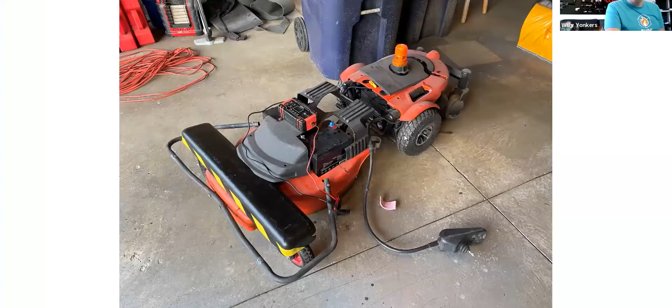So let me share my screen for a little bit, and then I'll jump back to show you my progress on that guy. Can you guys see what I'm showing on my screen? It looks like an orange tank.

So the back end is basically a power wheelchair that I got off of Craigslist for like $100. You can get these pretty cheaply locally. It's a little bit of a weird experience because it's usually from a family member who's had someone in their family pass recently, so you want to be a little careful about just being kind.

It's a little gross cleaning them up because they're very personal objects - there's hair, dead skin, and all these personal human things that come off of you are on them. So you want to clean it up. I did that, took it apart, and figured out how it works.

The hand control is a little too integrated to actually break apart and start rewiring things, so that's why I went with the decision to just control the joystick remotely, as if I was there with my hands on it. I basically took off the seat and threw it away, threw it in the recycling.

And then I got an electric lawnmower off of Craigslist also for like 20 bucks. It had no batteries, was really rusted and kind of crummy. So I had to get a pair of new motorcycle batteries for it - that was like 12 volts each, or 24 volts total, so it matched the wheelchair's power.

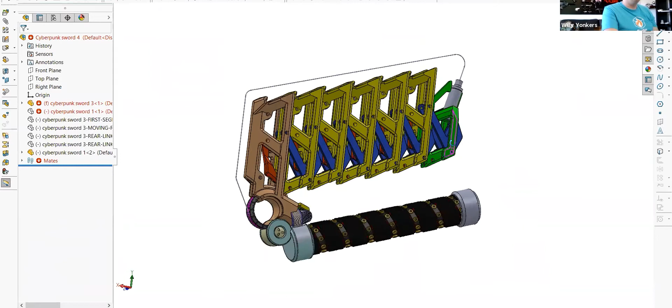So here's a bunch of projects that are kind of relevant to what we're talking about. I have this one up here. This is a crazy fold-out sword that I was going to make for a prop, semi-related to the game Cyberpunk, kind of inspired by that. I have a line of other Cyberpunk-inspired props that I can show off.

This is a product I made while at ThinkGeek. So this is a Bluetooth wireless game controller for iOS or Android.

I actually am on one of the early patents for the first iOS game controller, which basically we took a wireless Bluetooth keyboard, which is pretty much supported by everybody, and translated it into having the WASD keys on your keyboard doing up, down, right, and then AB and all the other buttons on your controller.

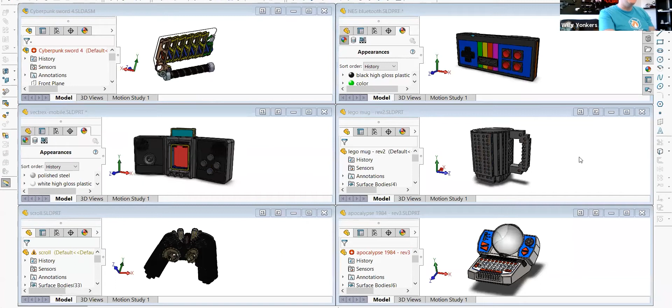So the first thing we ever did was the Icade, which was an April Fool's product. If you know ThinkGeek, every year we would do crazy fake products, and occasionally they would turn into real ones. So let's see.

This is an original kind of rendering of the Icade, which had the original iPad, which just slid in the top and then would connect via that wireless Bluetooth connection.

We actually made the first prototype before the iPad was on sale. So I made a mock-up, which was just a print of the front and back on a couple layers of foam core and taped it up and put it in the box for the video we did.

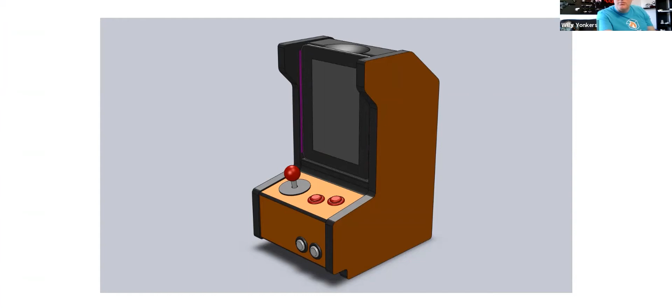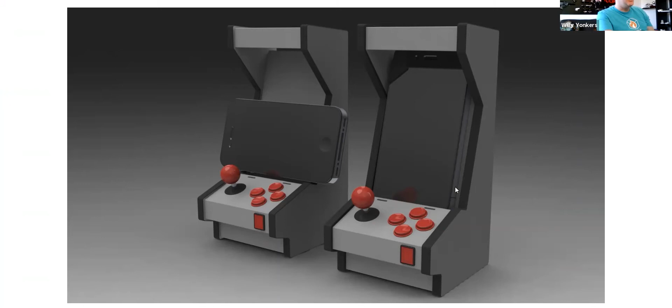Later on, we did some updates with some manufacturing partners. So this was a smaller version, which would hold your iPhone. It was designed around the iPhone 4 at the time. So it had a pass-through for the charging cable, but basically the same electronics as in the earlier Icade products.

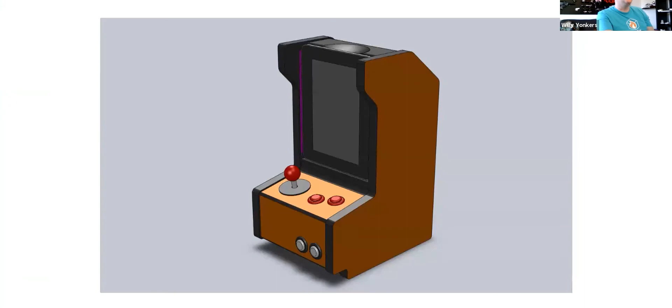So there was the original Icade, the Icade Junior, and then this little 8-bitty, I think we called it, which was a knockoff of the original NES game controller.

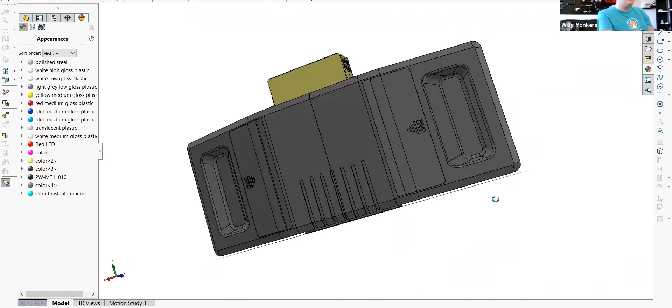So following a little bit with more of the gaming stuff, this is a fake product that I made that I never released, which was a portable version of the 80s vector graphics console, which was kind of a luggable object. It looked a lot like the original Macintosh computers, these big bricks.

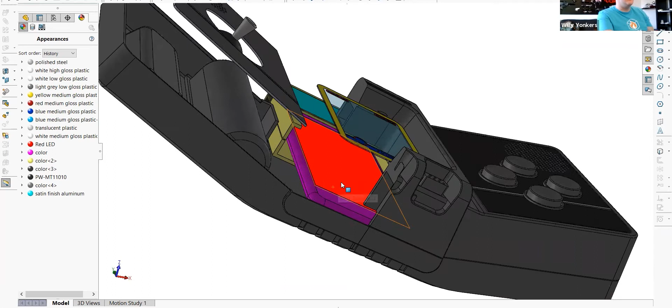But it had little cartridges and you slide it in. This version, I think I intended to put an iPhone inside. That was a good trick for making props and things - you just slide an iPhone in and put some graphics on the screen, and it lets you cheat a lot. You get fake screens that way really easily.

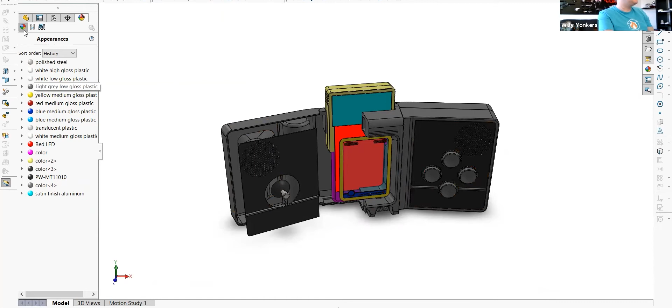This one I actually printed out and it looked okay, but it's not something I would ever share. Just kind of a fun thing to mess around with, using somebody's existing styling. It had this nice aluminum joystick.

The actual controller kind of folds up into the body of the unit and had 4 buttons. So I was kind of duplicating the functionality, things like that of it.

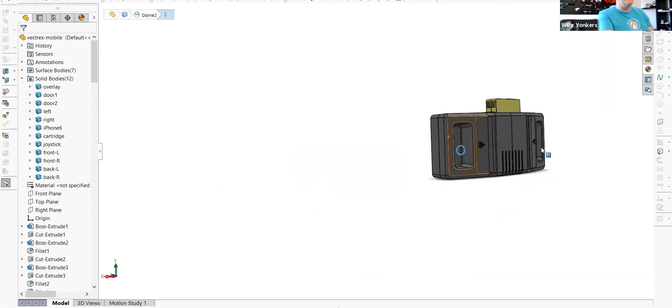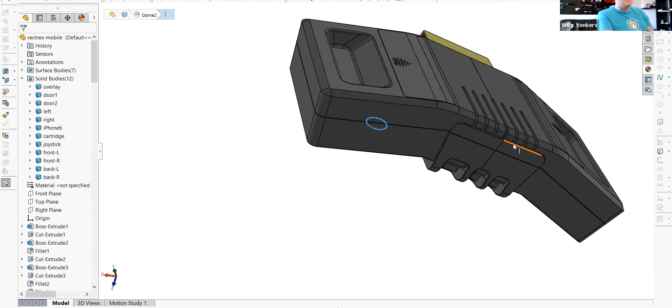I made a little bit of an affordance for how some of the electronics would work in the 80s. They didn't really have LCD screens back then, so I forget what company, but a couple of them made actually very tiny cathode ray tubes that were really weirdly shaped - they actually bent around a little bit. So I think one of those would fit in there, and I had some room for giant chunky C or D cell batteries to fill this thing up, and then it would run for like a half hour probably in the 80s.

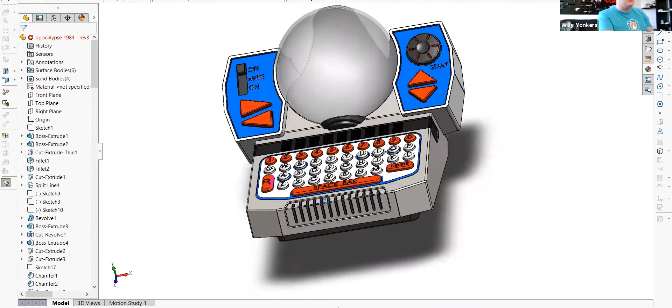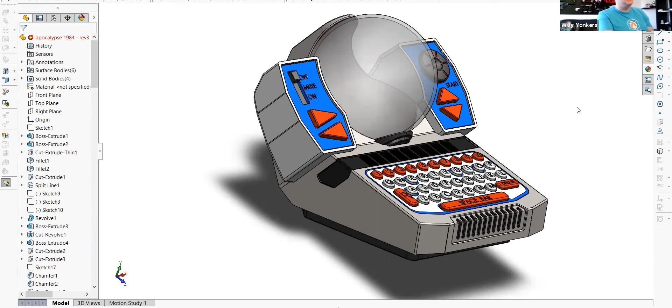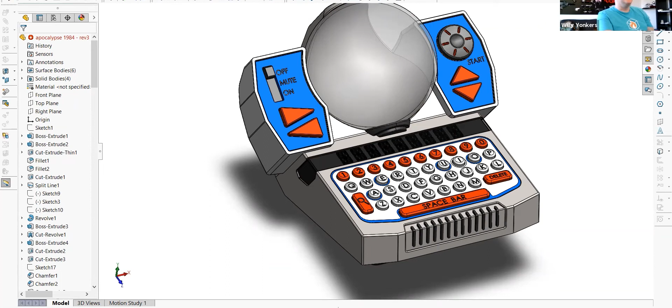Another fake product that never went anywhere was what I called Apocalypse 1984, a mashup of a Speak and Spell. It had the Speak and Spell buttons and segmented alphanumeric displays that would chime what your text input would be. Up top, not pictured in this rendering, was a persistence of vision LED globe, an arc of green LEDs that would blink on and off as it spun, showing a map of the Earth. You'd target different cities with different weapons, like having Bigfoot attack New York City, and it would give you feedback on the damage. It was a pretty dark thing, but meant to be funny.

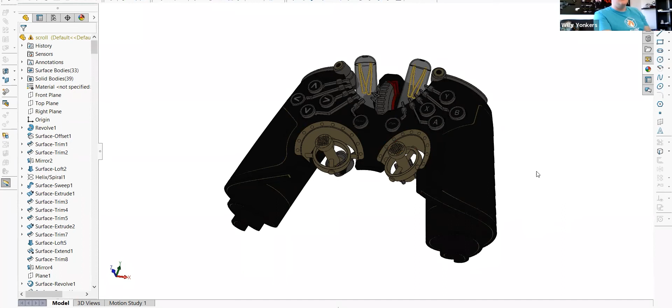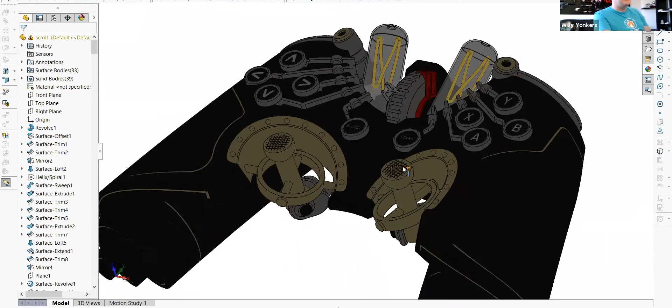Another April Fool's product that actually did get launched was a game controller for a Steam-powered Steam console. This was at least 5 or 6 years ago, when Valve was trying to break into the living room market, selling small pass-throughs that would pipe your big high-end PC gaming into your living room via HDMI, and you'd play it on a weird little controller. We made a fake steampunk-inspired version. It was sort of Art Deco-y, very steampunk, with little mechanical typewriter keys, some Edison light bulb stuff, and lots of brass, chrome, and phenolic plastic.

One of the products I did actually make while at ThinkGeek was the Build on Brick mug. This has been knocked off a ton—if you go on Amazon to look for it, you'll find more fake ones and knockoffs than the actual legitimate article. But this was a product that I worked on from start to finish.

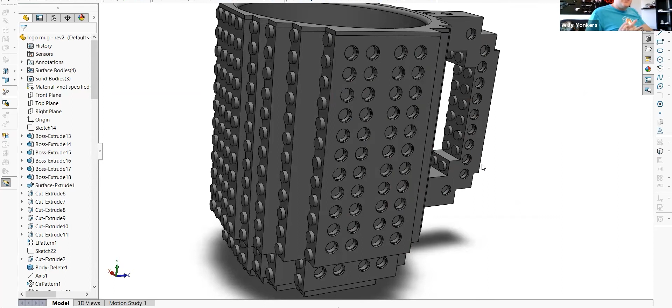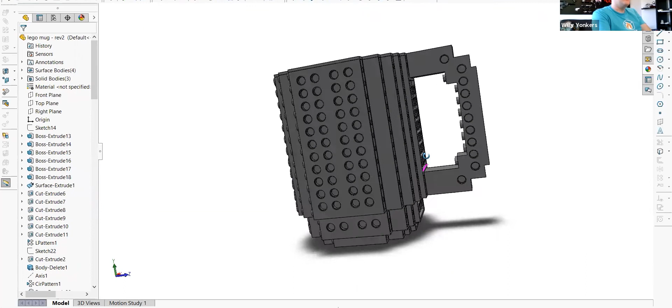We were talking about products at ThinkGeek that were selling well. We had a really informal structure there, where every once in a while I would have meetings about what was selling well. When I started there, ThinkGeek was like 90% existing products, so we had buyers who would buy cool things, a lot of them gray market from Japan—geeky stuff, like a weird Gundam thing or some knockoff Star Wars thing that we'd sell for a bit and then get a cease and desist for and have to take down.

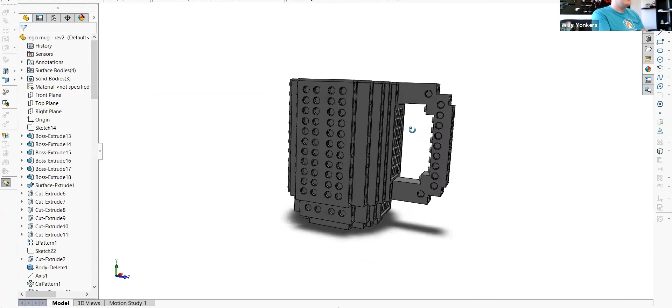What inspired this was that a long time ago there were coffee mugs that looked like high-end telephoto lenses, designed for photography geeks. We were talking about how we could reproduce the success of that—it was an actual legitimate product that wasn't licensed to anybody, so we were just buying those off the open market and selling them on the website. So I thought about things that geeks would like and that were fun to accessorize and play with on your desk.

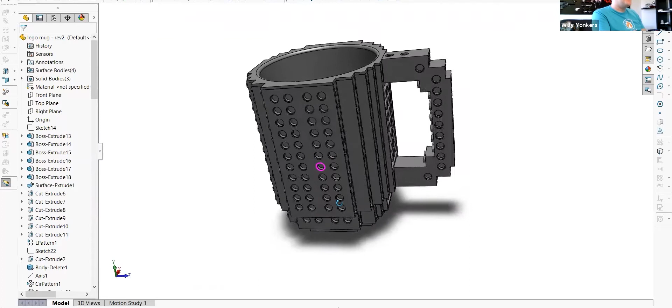And I've been a lifelong Lego fan, so this is inspired by Lego Technic. It's actually built and designed around existing bricks, except for the inside, which is this giant vessel.

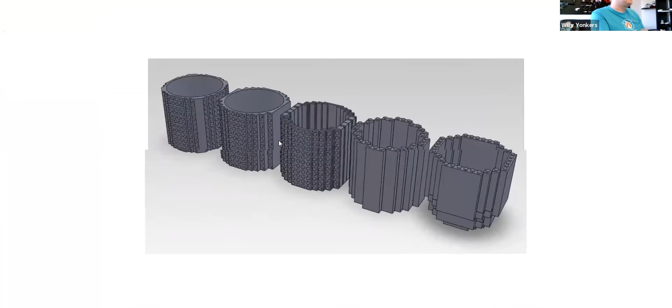Let me open up an image of what that looks like. Here's some of the earlier process work—if you would build it vertically using stacked regular bricks, a couple of different options for that, kind of pixel art from a top-down view. These are some other options for making it out of stacks of plates and bricks. This is probably closest to what I actually went with. Over on the far left is an idea that gets a little further away from traditional Lego geometry—there's this weird sacred geometry of 8 millimeters per stud and things like that, so that was having building surfaces on all the faces.

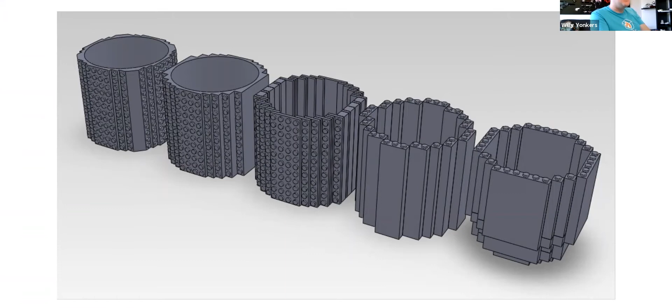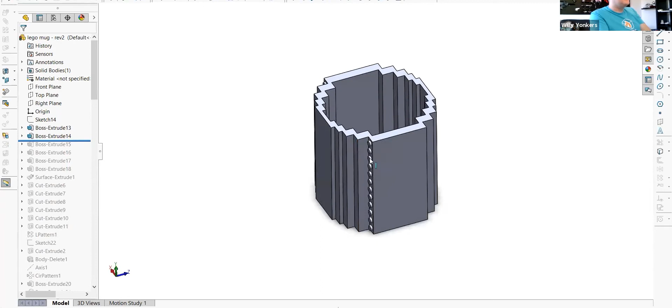So that was some of the early process work. You can kind of see—let me turn off perspective. This is me working out a sketch of how the plates would stack up. Let's pull back. Here's a really early extrusion of the profile, starting to add studs onto it, and more studs galore. It actually went pretty fast—oh, it went to the end.

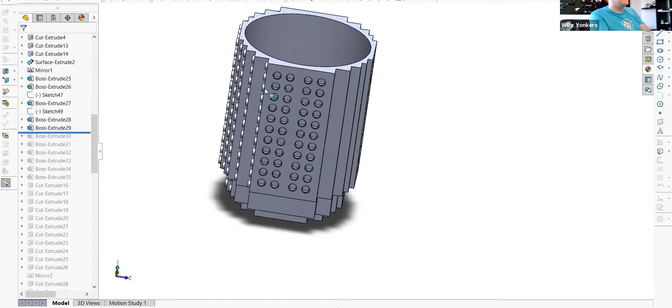So, adding the Technic holes on the sides—it's kind of an unusual pattern, and a lot of reviewers didn't understand how you use it. The Technic pattern is meant to have a spacing across that matches the spacing up and down, but you have to pass over a couple of these holes. Let me open up the other image I have of it.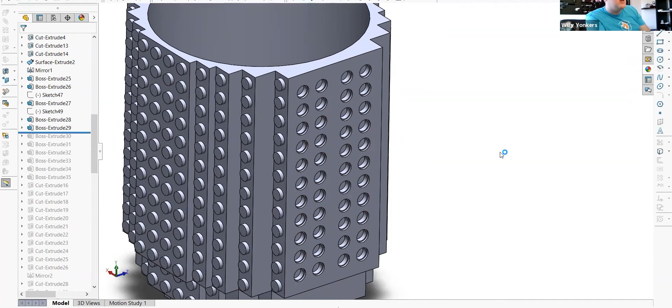Okay, so this is the original spec sheet we made and sent out to a manufacturer in Asia. This is a better rendering of the final product with little lines that show you where the line breaks between parts would be. Across these 4 holes is about the same distance as across these 5 or 6 holes up and down, so you could use a beam in either direction and connect them.

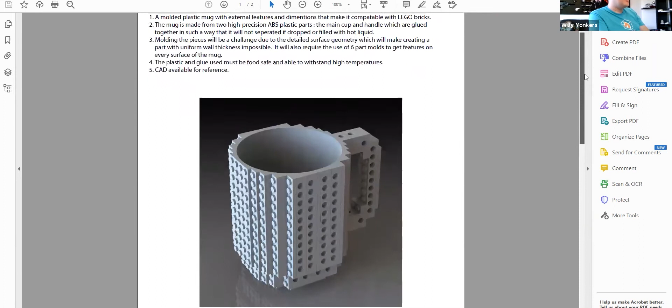So we did pretty low impact design work there. A lot of our stuff was just an illustration by a graphic designer of a cool looking ceramic bowl that would be like a shark's face opening up, and you would eat your cereal out of the shark's mouth. This one was a little more in depth because it was very technical, so I did the full CAD for it, just some material options for how it needed to work as a real product.

I don't think they actually made it out of the right plastic for us. It was supposed to be ABS, but it was a little too cheap, so probably they got away with something.

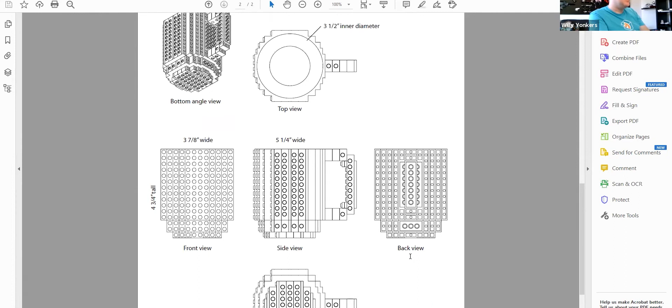Some kind of measured drawings, half scale, because it was an 8.5 by 11 sheet that we would print out. But this was basically what we'd send over to Asia and have some of our manufacturers quote on. We'd do a bunch of design work, a bunch of research, and then kick it over there for quoting for a couple 2 to 6 weeks, and then people would send back estimates on how much it would cost to produce something. We had a bunch of different factories and manufacturers who we would work with. Not all of them would necessarily want to work on these projects because some of them were a little crazy.

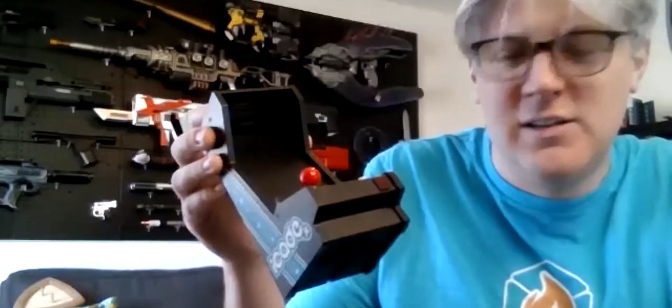So kind of fun things. Sometimes manufacturers get a jump on you and just go wild, and you end up with an actual prototype first article after like a month, when most of the time that's like a 4-month process waiting for them to get in gear and actually quote on you.

So yeah, I love working on game controllers, things like that. I worked at SteelSeries, which is a high-end gaming peripheral company. I actually designed the mouse that I'm using right now.

So this, I think it's the Sensei or something, I forget what it's called. This is the righty-only one. I did another one that was ambidextrous, so it's symmetrical down the middle.

This is another thing where I started the job and they had a huge product line already, so I didn't get to do the styling work of it. I did get to do all the surface modeling in SolidWorks, a little bit of the pattern design. You can see there's this kind of crosses that are triangular - this is a rubber pad, a little bit of the skating surfaces to keep it off of your mouse pad.

But yeah, that was actually kind of a whirlwind project. I started there in the summer of 2015, I think, and had those 2 mice done by November or something. It was crazy. And I did a bunch of other projects for them that didn't get released, but I didn't work there super long because they didn't do super well financially.

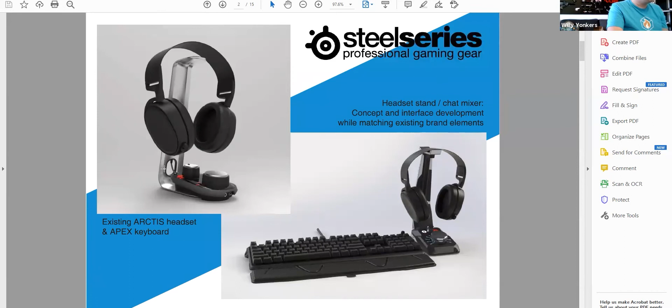This is the SteelSeries stuff. So this is a project that didn't get released. These are some headsets that they have been making forever, since before I even worked there. So I didn't work on the headsets, but we made this stand that had a sensor up at the top that would detect if you'd placed your headset on it, and it would switch between the sound in your PC going to the headset or going to your room speakers just automatically when you set it down.

And then there was this big kind of control deck below it for volume control, and they had a channel kind of fader for your chat in the game or your music that you were listening to in your headphones. So this is kind of what the final product would have looked like. This is just some earlier work with one of their existing keyboards and their existing headset - some of the early process work.

It was a little weird, but frustratingly typical that I started there and they didn't really have all their files and information and images organized well enough to kick off a project. So in the beginning, I actually modeled my own headset - this is not something that ever existed. It's just this kind of goofy, overly rounded, fun headset with a big microphone bar and a little scrolling text field there, which I thought was kind of fun.

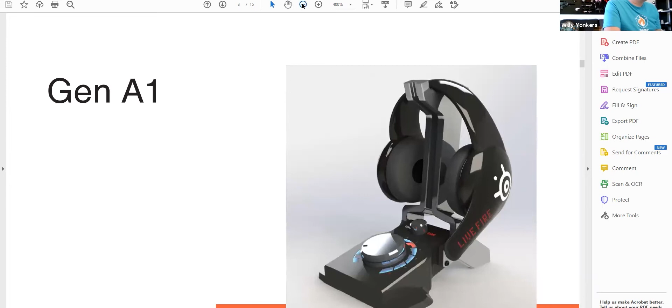And this was one of the very early designs I had, and it looked way too much like the knob on a washing machine, so we didn't go with that, obviously. But I did a bunch of kind of iterations for that early, non-technical, non-mechanical, just kind of the interface project parts of it - the volume control, the fader control, and a stand. That was it. So that's in all these.

This one looked like a parking meter. This one looked like a rotary phone. And then as they kind of collected more and more information and got it to me and told me about what the product should look like, I started honing in on what they wanted and what would be more successful for them as a product.

So the actual control deck started to slim down, look a little bit more like some of their keyboards. The headset stand had the most freedom at this point, so I was playing around with some kind of 2-color, not overmolded, but kind of intermeshing shells of different colors and materials. There's always going to be kind of this U-shaped yoke at the top that holds the headphone headband.

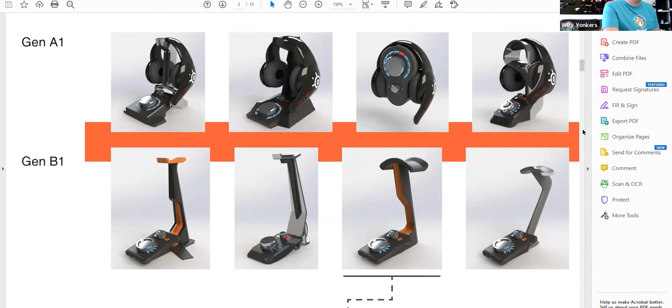But you can see, nothing really came out of the first generation. Generation B had something that kind of led forward. This kind of celery-shaped thing for the stand led to some more exploration of doing just plastic stands. A lot of this is a mishmash of parts that could be kind of interchanged quickly - there was the stand, there was the knobs, and there was the electronics box. So there's a bunch that are kind of similar to this one.

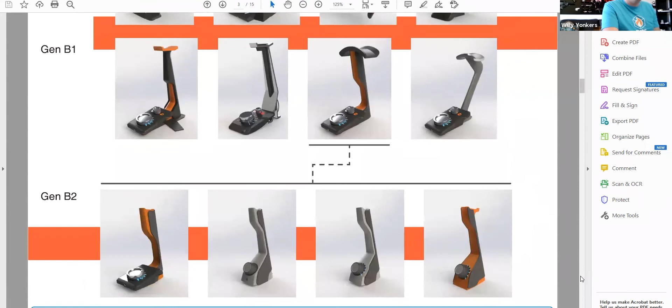After I presented those, they let me know that they actually had an existing headset stand, which was not stamped, but a formed strip of thick sheet aluminum. So we started doing more experimentation around this sheet metal version.

More boxes that I could explore on my own, separate from the stand. It had this little pad on top that was rubber with their logo in it. In this one, we start to see an optical sensor instead of a button or some sort of weighted switch like on earlier products.

This is a bit from that celery-inspired design—a curvy cross section with a kind of tortured stamping of the metal. It wouldn't be simple to form, but it was more structural and more fun to look at.

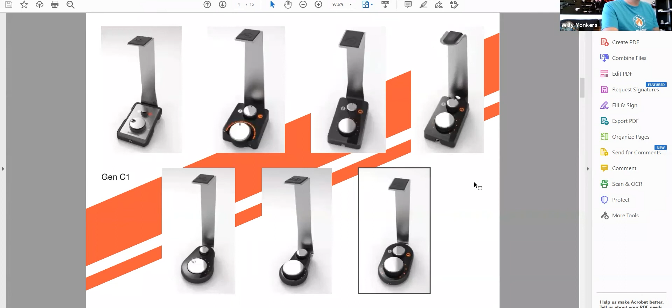And these are some of the interface pieces—the kind of washing machine, rotary dial phone, high-end stereo equipment look, with these very small lines and big, beefy, heavy knobs. Further down the line, we got to talking about having glowing elements, LEDs behind a kind of smoked glass or dark plastic.

Chat? Sorry, I'm trying to see if there's a chat. Oh, okay.

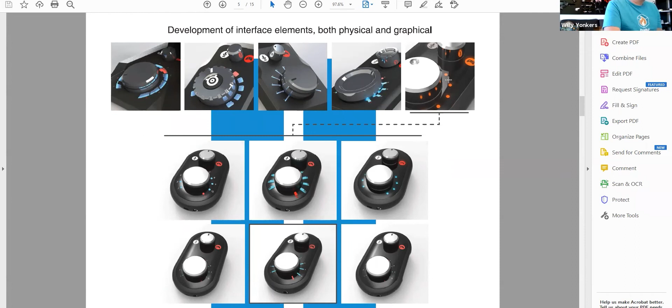Yeah, lighting up through there, lots of exploration. And this is the final presentation—their logo was the only thing you'd see while it was not lit up, and then the interface would actually show up later on.

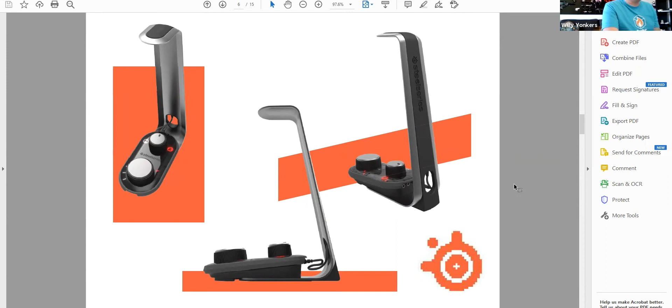So this is that iCade 8-bit line, just kind of a feel for making a family of products. A little bit of ergonomics control—I chopped up a PS2 controller to figure out where to put buttons and things, some early renderings, and figuring out how to assemble it in a factory.

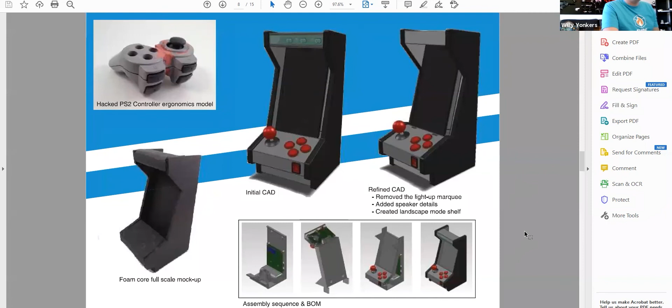Well, I didn't think I had this in there. This is a really early project from the first company I worked for—it was a snowplow controller for contractor snowplows. You guys are in Rochester, you know snow. So guys who bolt snowplows to the front of their car buy those things for a few grand and make a few grand back every winter. But a lot of the time they have hydraulic controls for tilting and steering the blade on the front.

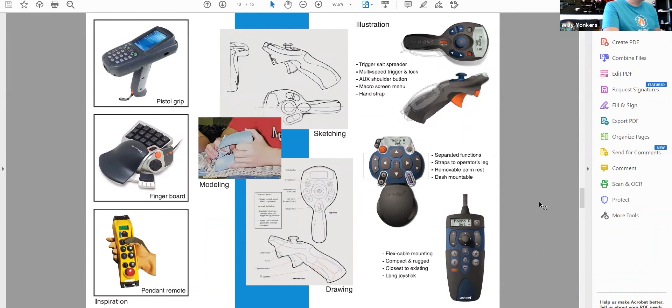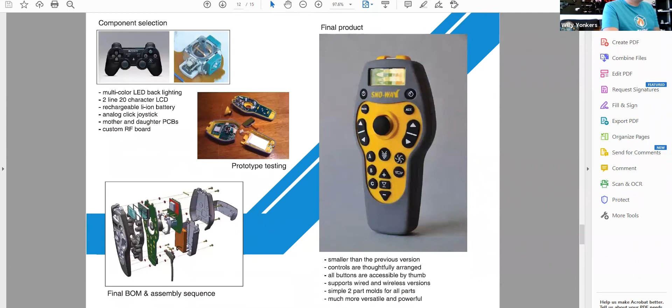So we did a bunch of exploration illustrations. These three are done in Illustrator, just a front-view kind of shaded illustration exploring where the buttons go, exploded views of parts, early first-shot testing, reusing stuff from my gaming career, kind of learning how to do things.

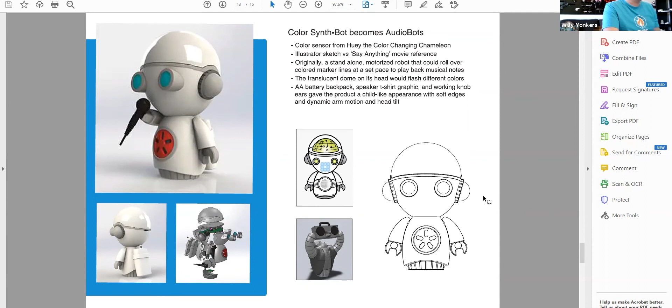The last one in this block is Audiobots, these fun little characters I came up with at ThinkGeek. This was going to be a standalone product with a sensor on the bottom that would detect different colors of light—so you'd put it on something and it would play a note based on the color of your shirt or something. We had a fun character to base things on, and I started messing around with how it could be more of a musical toy.

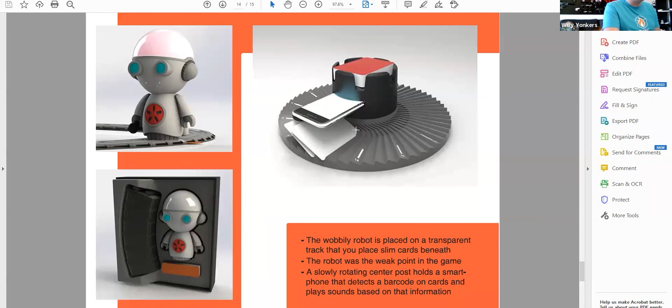So here he's running around on a kind of railroad track that you put colored tiles under. This is another thing I tried to make, an iPhone app that would look at cards and spin slowly around, so you could put notes down.

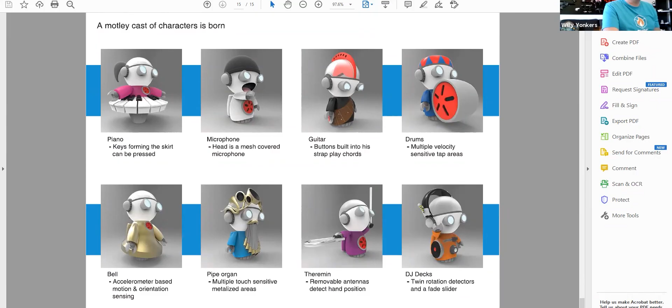I'm going to go back to stopping sharing. You'll see my face again.

So yeah, I do lots of stuff with Lego products. Nerf is kind of a fun thing—if you look on Reddit or something, there's all kinds of communities for modding and redesigning Nerf blasters. But the thing is, they're intimidatingly amazing, so it's not something you can easily break into. You can mess around with it because 3D printing is so accessible nowadays, but you can't really design something to sell to Hasbro, or even sell on Etsy, because there's guys out there who are just crazy amazing—it's a wonderful world to look into. But I've been doing this for 20 years, and it intimidates the hell out of me.

So yeah, that's pretty much everything I wanted to cover. If there's any questions, we can talk through anything—I've got a whole couch full of more products I can show you guys.

I have a bunch of— Willy, thank you so much. That's a great roundabout discussion on a lot of things. You're a prolific inventor, entrepreneur, and we'd love to hear a little bit more about that. But we just want to give you a round of applause for a great presentation.